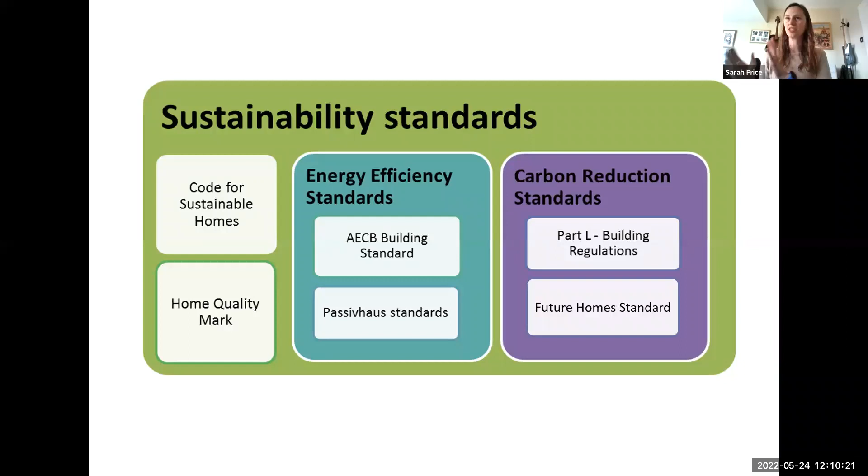The AECB was founded in 1989, and they actually launched the Passivhaus Trust in 2010, so they brought Passivhaus to the UK. Their purpose is to deploy environmentally responsible building practices. The AECB really looks at the cutting edge of what's going on in buildings, in retrofit, in new build, making sure that we are doing the very best when it comes to our buildings. They do an awful lot of training, and loads of things as a membership organisation, including lots of training under the Carbonlite brand.

But we also have these standards, the AECB Building Standard, and there's a Retrofit Standard as well. It's the building standard that we're interested in today. I'll talk a bit more about that in a second, but there's also some complementary mini standards around water, daylighting, and whole life carbon as well, which is the newest one.

The AECB standard is based on the Passivhaus standard. Originally we used to have different levels, silver and gold, and the gold was replaced by the Passivhaus standard, and then the silver became the AECB building standard that we know today. It's got slightly relaxed targets compared with Passivhaus, so the space heating demand isn't quite as onerous, but there's still quite a good airtightness target. Essentially, the rest of it follows all the rules of Passivhaus. You use the same modelling tool, PHPP, and you have to make sure that you meet all the Passivhaus requirements.

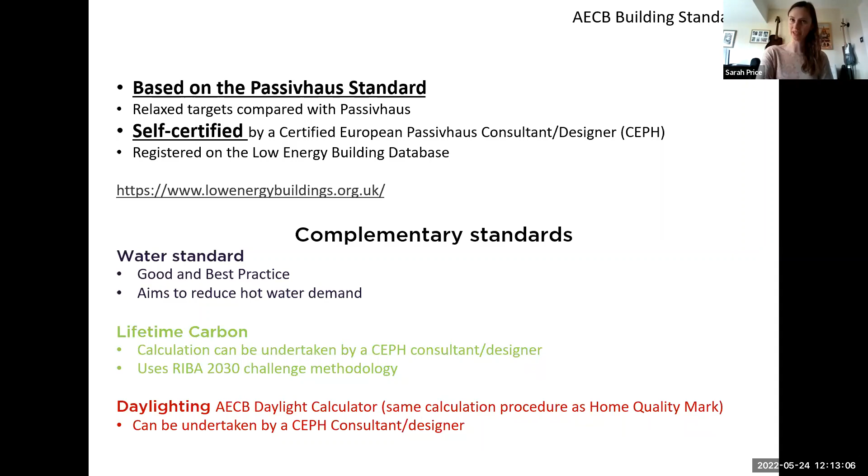AECB and Passivhaus principles are that we are aiming for low energy bills and comfortable living conditions. We've got possibly southern orientations, but we're making the most of that solar gain without having summertime overheating. We've got high levels of insulation, ideally a thermal bridge free design, or certainly continuous insulation. We've got continuous air tightness, absolutely, so really low levels of air tightness. And in Passivhaus, certainly we have high efficiency heat recovery, MVHR.

The AECB is actually slightly flexible. You can have MEV or MVHR, but today we are really focusing on the MVHR side of the AECB standard and the air tightness that goes with that - the 1.5 air changes that goes with that MVHR.

Obviously, it's not all just about space heating. We have to look at everything that goes in the building. So we're talking about regulated and unregulated. And then we've got a quality control process.

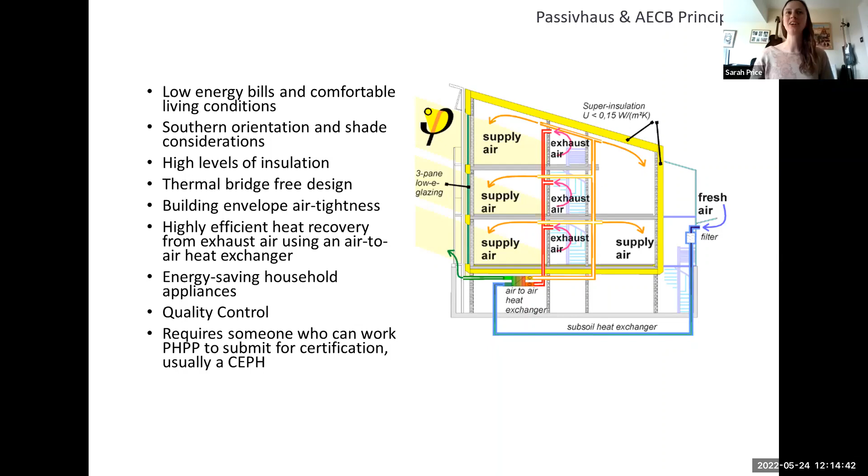In Passivhaus, it's slightly more rigorous. You have a third-party independent certifier who checks all of the information coming in. And in AECB, you have to bear all and put it all on the internet to get your project certified, uploading certain types of evidence required for the low energy building database.

So if there's one thing we know about Passivhaus, it's that there's no performance gap. We know that they perform. You may have seen this graph before, it's been used lots of times, but each one of the blue lines is a different building. We've got four different developments here in Germany.

We're interested in the average energy consumption. We've got little S curves on each of the sites because that's to do with occupant behaviour - some people like to keep their houses really warm, much warmer than others, and maybe open the windows, whereas others like to live in much cooler houses. So we'll always see this S curve, and what we're interested in is the average of that. What you can see is that it matches the actual energy consumption, matches the PHPP calculation.

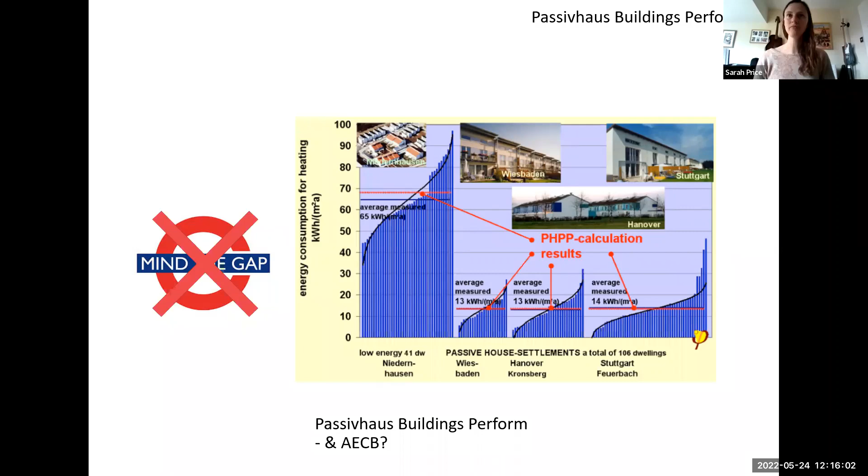That tells us the buildings are performing as we've designed. There is evidence that AECB buildings are following the same kind of profile. They've redone this research in the UK for Passivhaus buildings, and their findings are the same. For AECB buildings, it's not yet published, but there is evidence out there that they do also perform.

On the other side of things, we get a lot more out of Passivhaus and AECB because we get superior comfort. Sometimes Passivhaus is known as a comfort and energy standard, and that's simply because you go into a Passivhaus and you don't notice it - you don't notice hot head, cold feet or anything like that. It's just perfectly still, perfectly quiet, reduces noise pollution because of the air tightness.

You've got no temperature gradients, no drafts, really good indoor air quality so it doesn't feel stuffy. It's not too hot, it's not too cold, so we've got protection from overheating. It's beneficial for allergy sufferers on the health side because we're trying to filter out all of those pollutants from inside and outside of our homes and buildings. And we've got really low energy bills as well.

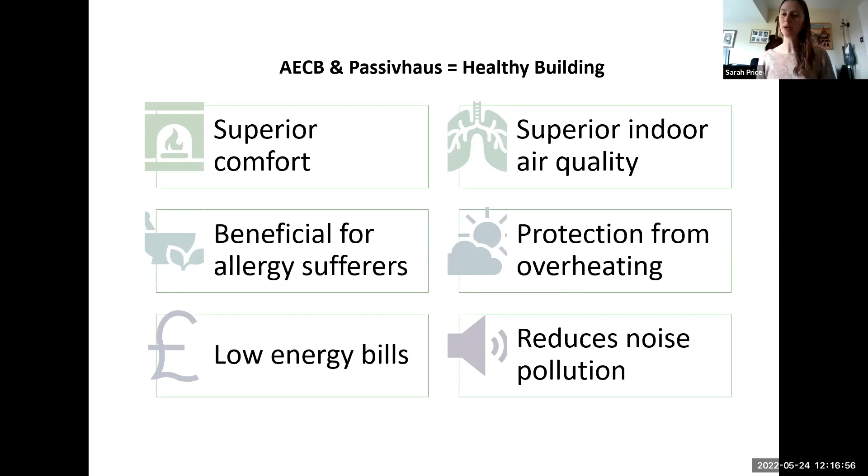So lots of other benefits from the AECB standard. That takes us on to the future home standard. Let's have a little look at building regulations and where we're going.

This is a diagram taken from the Passivhaus Trust Demystifying Air Tightness Guide written a few years ago. If you printed this out on an A4 piece of paper, it would give you the actual size of hole to achieve that air tightness for a metre squared of wall, roof, or whatever it is you're looking at. For every metre squared of external envelope, you would have something about that size - so it's relative air leakage.

Now for Passivhaus, obviously it's quite small, and EnerPHit, which is the Passivhaus Retrofit Standard, is a little bit bigger, and then the AECB MVHR standard is around 1.5 air changes. Building regulations' notional building is set at 5 metres cubed per metre squared per hour, and you can see quite a lot more holes in every metre squared.

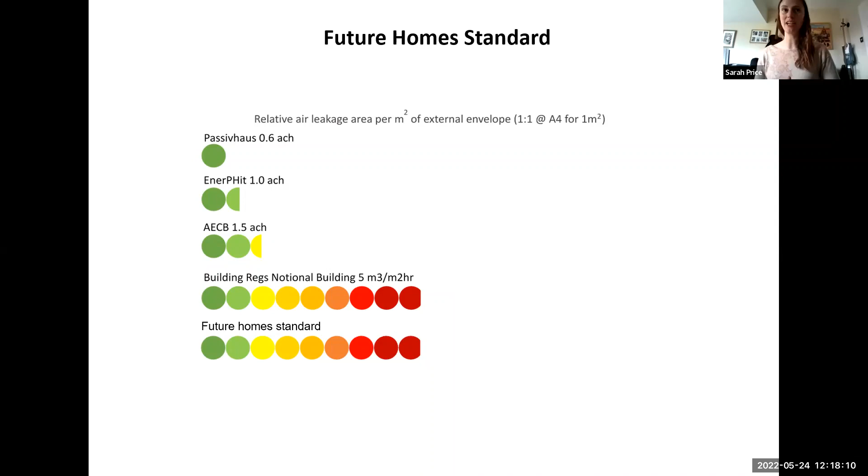Now, where are we going with the future home standard? Therein lies the problem - we're not going anywhere with it in terms of air tightness. The suggested future home standard indicates that there's going to be no improvement in air tightness.

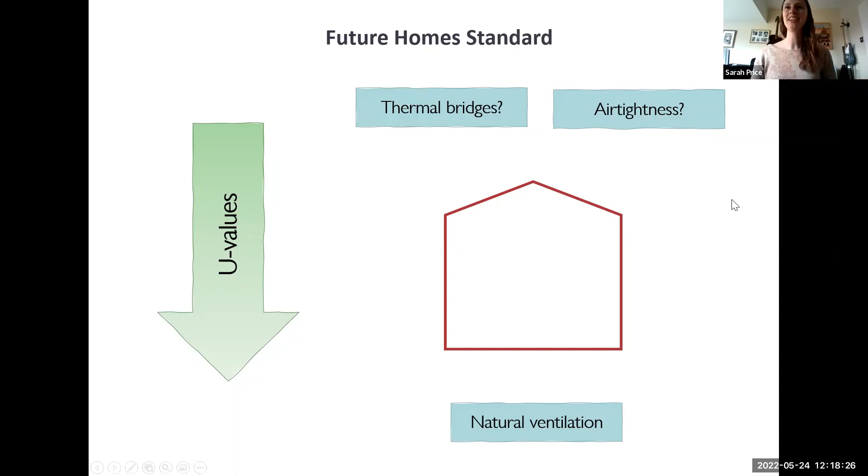So what we do see is a dramatic drop in U values - we are really increasing the amount of insulation we're going to put in our buildings. But is it really dealing with thermal bridges and air tightness? Unfortunately not. We're not seeing any improvements in air tightness or thermal bridging, and it still allows natural ventilation.

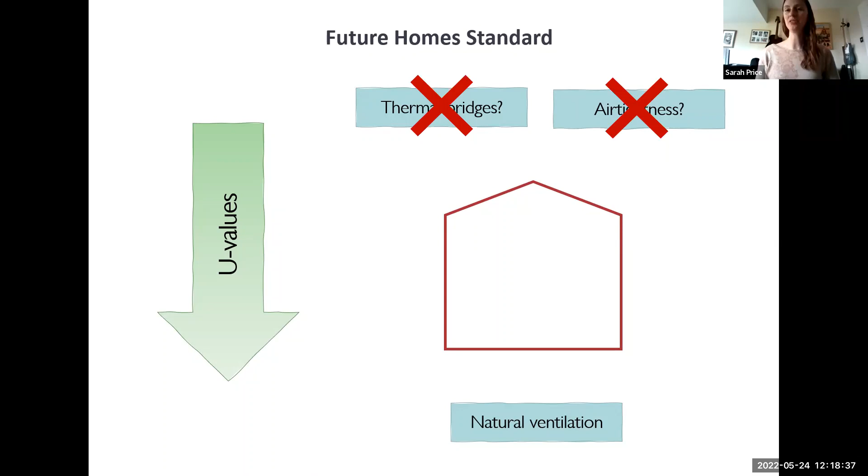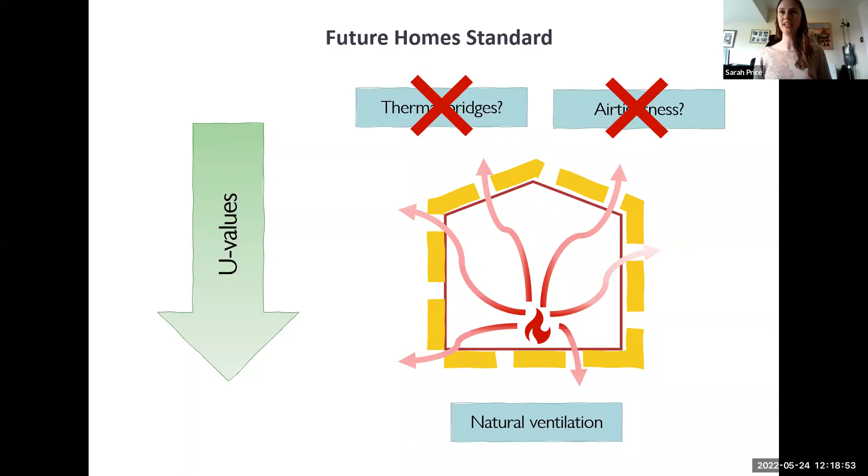So actually what we're doing is building really well insulated wind tunnels. Lots and lots of insulation, but it's not continuous. We haven't got good air tightness, we've got natural ventilation, so we're going to be letting a lot of that heat out in other ways.

This takes us nicely on to Wolfgang Feist, who was the father of Passivhaus in Germany. In the late 1980s, he gave this statement: I was working as a physicist. I read that the construction industry had experimented with adding insulation to new buildings and that energy consumption had failed to reduce. This offended me. It was counter to the basic laws of physics. I knew they must be doing something wrong, so I made it my mission to find out what and to establish what was needed to do it right.

Now, I feel this is where we are heading in the UK. Germany was there 30 years ago, developed Passivhaus, had a look at all the bits that matter when you get down to low energy buildings. And our future home standard is heading towards this scenario.

So some nice graphs for you just to try and illustrate this a bit more. I've taken the gains off, so just to not confuse us, but if we just look at the losses in this particular archetype, this is a semi-detached house, just as an example. The blue is the heat losses from walls, roof, floor, windows and doors, so all of the insulated elements. The red is the heat losses through thermal bridges, and the green is the heat losses through ventilation. This is ventilation and infiltration, so the leakiness of the building plus the heat losses lost through natural ventilation.

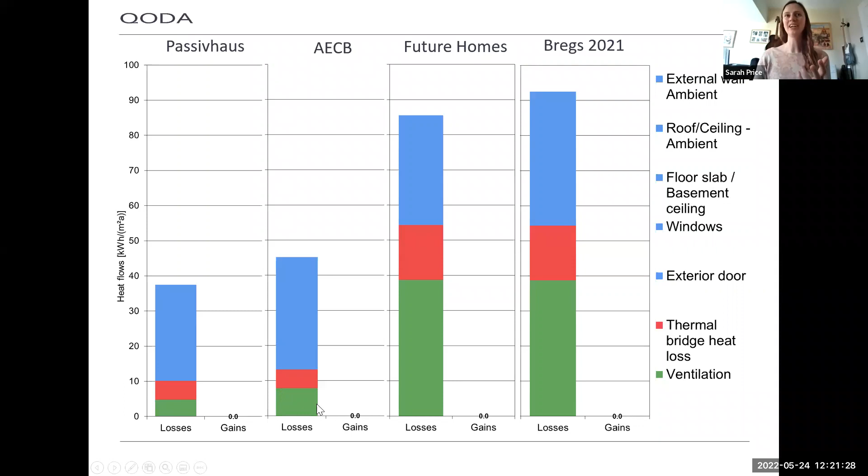AECB standard at 1.5 air changes really improves ventilation. We've got MVHR as well, so we're recovering heat. We've reduced the thermal bridging. U values are about the same, but you can see that we've almost cut in half the total energy use, the heat losses. Then Passivhaus, again, we're reducing that a little bit further still because it's better airtightness. So you can see that what is left is really concentrating on thermal bridges and ventilation.

So I'm going to hand over to Tim, who's going to tell me when he needs his slides changing. Yeah, great. Thank you, Sarah.

Good morning, everybody. So we've been modelling 6 residential archetypes for a district council in England, pretty representative of anywhere. We've developed a series of specifications based on different building standards, and we've tried to apply a level of parity between the Future Home Standard and the AECB Passivhaus standards. So the AECB and Passivhaus specifications are actually a reflection of the Future Homes notional building standards as far as we know them, and they're not tied specifically to the AECB or Passivhaus targets, such as space heating demand. It's really just trying to get that notional parity between the standards.

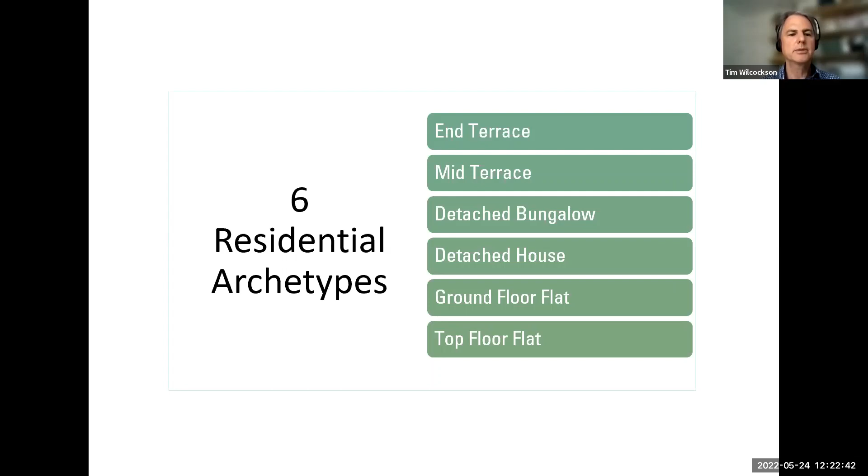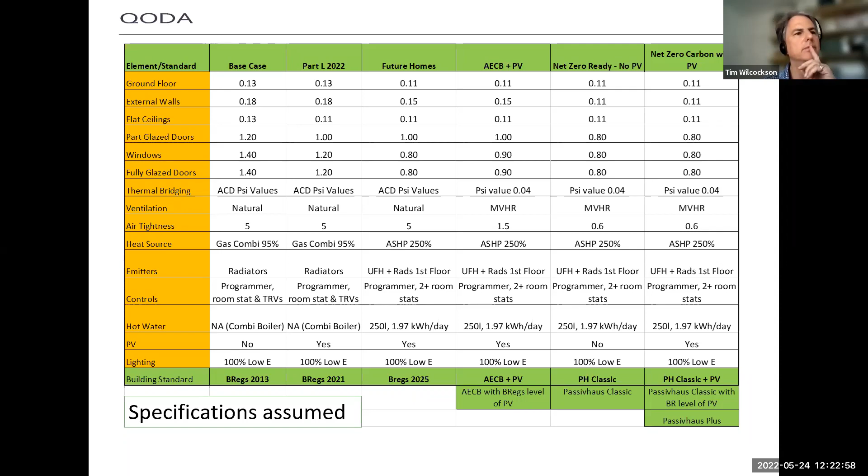So comparing these standards isn't ideal. These are the sort of specifications that are assumed. We've got the different standards, and you can see the differences in the specifications are, in fact, in terms of the fabric, pretty similar, whether it's Future Homes or AECB or Passivhaus. They are remarkably close on that level.

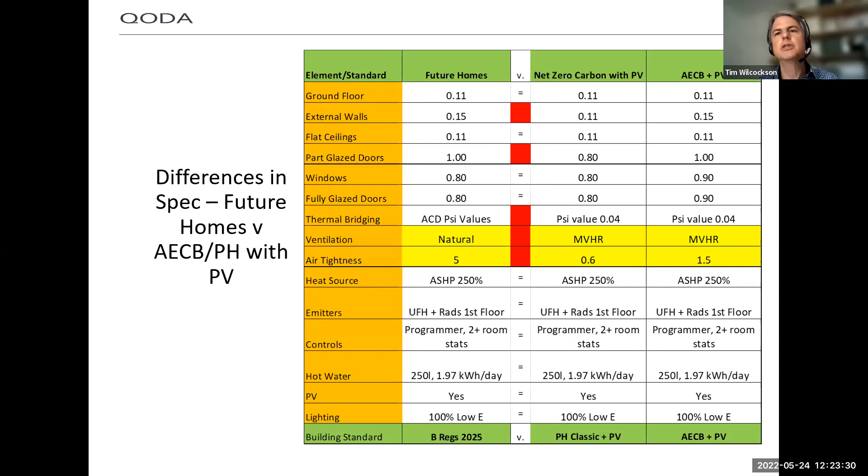However, I would like you to notice the levels of airtightness difference and the type of ventilation system, which we see as the key elements when building future homes.

So like all building regulations, Part L building regulations, Future Homes is rooted in the SAP methodology, and the new SAP 10.2, which will go live in June alongside the Part L 2021 regulations, will adopt increased cost per kilowatt hour. As we all know, it won't necessarily reflect exactly what we're actually paying. I've already seen for my home that we're going to be paying about 29-30 pence a kilowatt hour, maybe more. So energy costs are rising fast.

The fuel carbon emissions factors are coming down in SAP 10.2. So the Future Homes Standard has a stated aim of reducing carbon emissions by 75% and promotes electrification. I find it's a rather curious coincidence that the contribution from renewables nationally has been calculated and apparently shows a 73.8% reduction in carbon emissions from electricity since the last evaluation in 2012. By contrast, there's little change in the carbon emissions factor for gas, but the electricity reduction is significant.

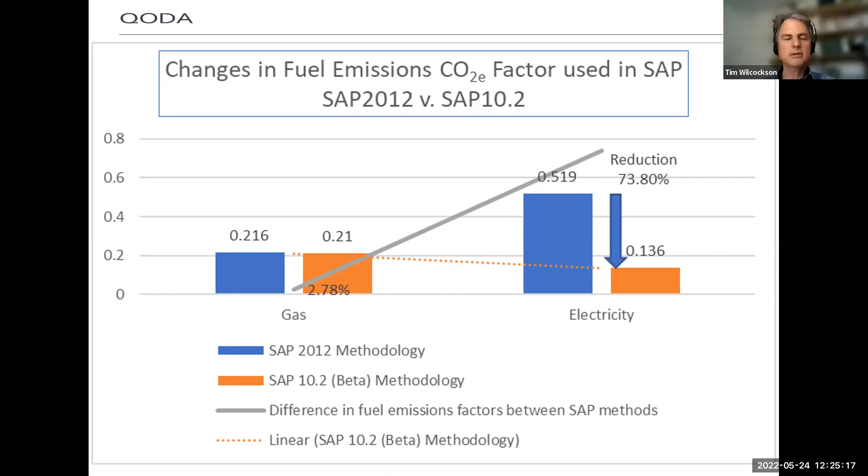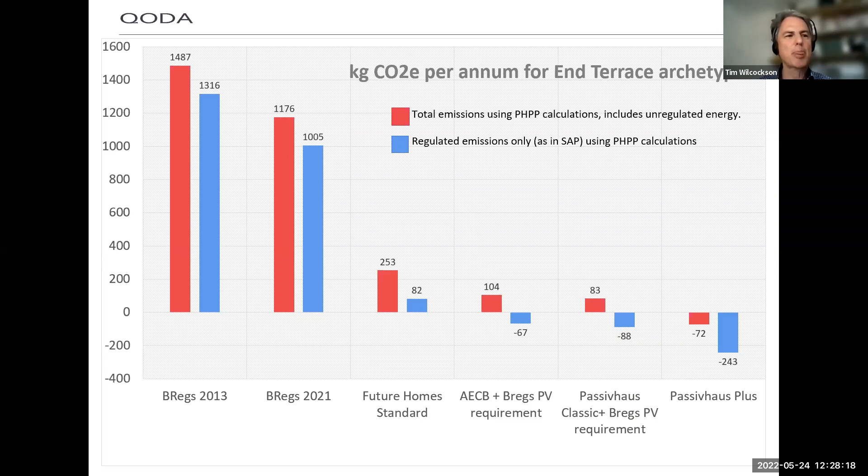So another way to look at this is to start with a fabric first approach, incorporating the MVHR ducting and air tightness that we need, and then add PV retrospectively, taking advantage of future improvements in PV efficiencies to enable minimal CO2 emissions. Something like the new panels that people are talking about, which are based on perovskite, for example, in Oxford.

This approach sounds remarkably like the Future Home Standard approach. It reduces long-term retrofit costs and occupant disruption, while at the same time locking in carbon savings for the lifetime of the building.

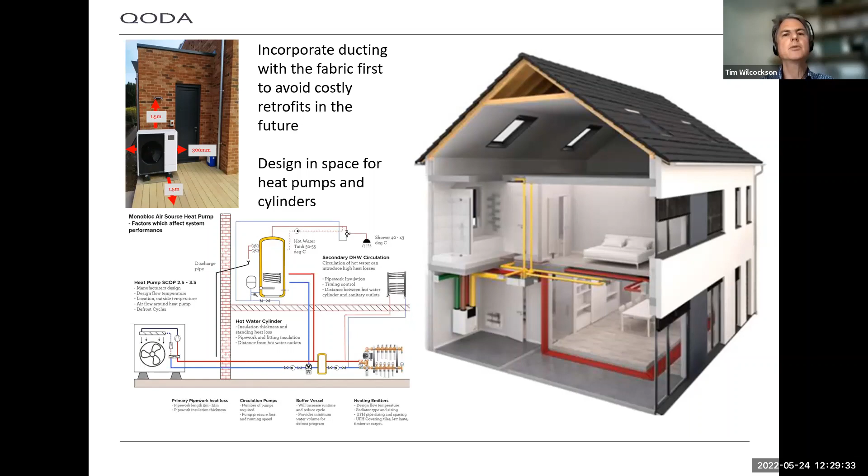Future-proofing by designing in space for heat pumps and hot water cylinders or cabling for energy storage would be sensible design precautions to ensure the fundamental fabric of a new building doesn't need to be disrupted. However, the Future Home Standard fails to provide the key element in the jigsaw, which is the air tightness of 1.5 or less with an MVHR system.

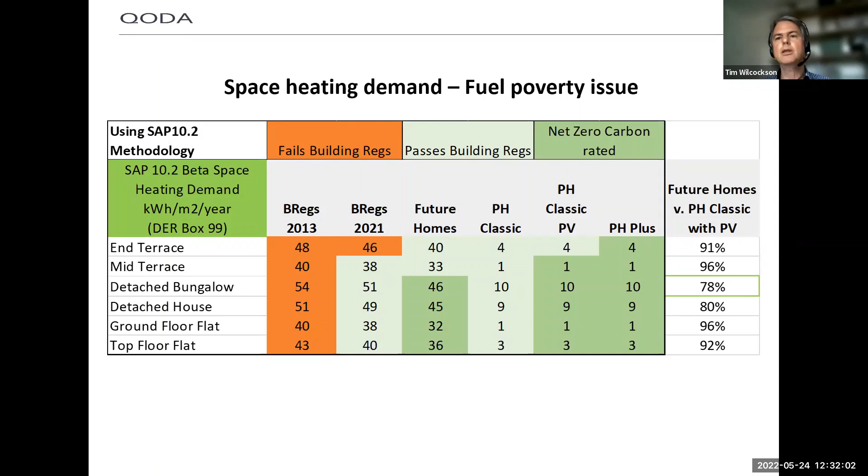The cost of constructing an AECB or Passivhaus standard home has been shown to be an uplift of about 6 to 8% compared to constructing a Future Home Standard home. But the annual long-term savings in energy bills that the AECB approach can bring will hugely benefit individuals and bring many other positive impacts locally and nationally in ways that more than repay these capital upfront costs.

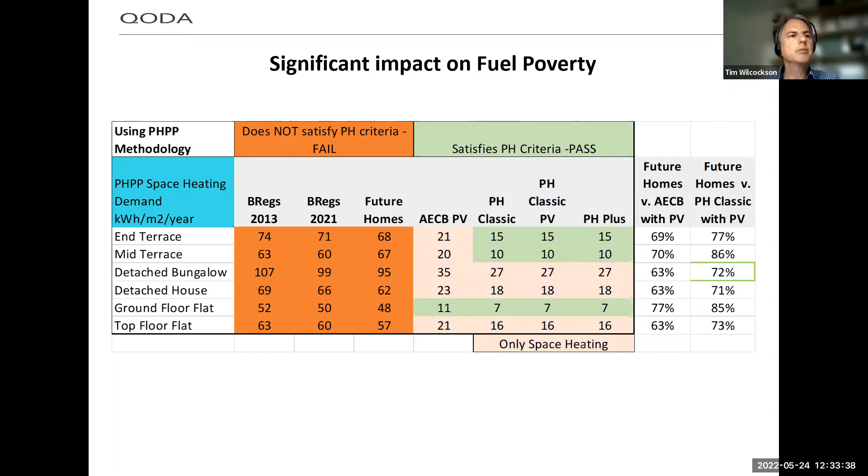And these are the International Energy Agency report back in 2014, illustrated some of the benefits of this low energy approach. It's really has a very big impact in many areas of our lives. Next slide, please.

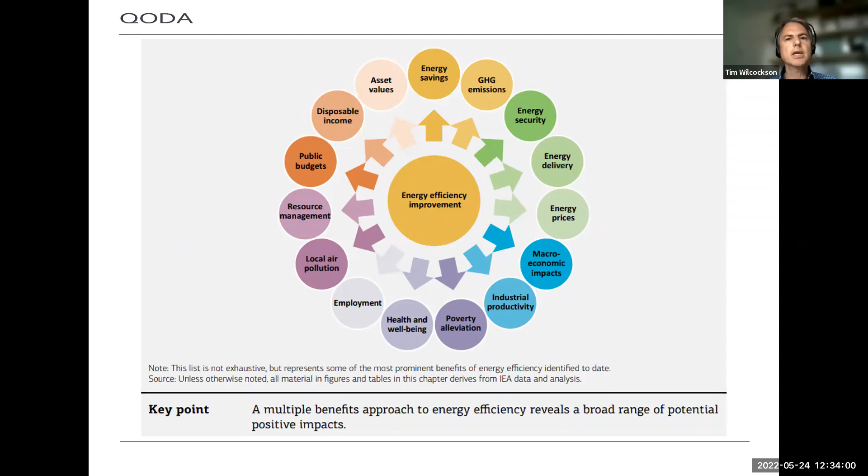So when we look at these two approaches, whether it's through the SAP building regs approach or through PHPP, we can see in both cases that there is a dramatic reduction in space heating.

What we see with the Future Home Standard is that we can provide a well-insulated wind tunnel, as Sarah has mentioned. But really what we're looking to is get some woolly jumpers with a Gore-Tex wind barrier included if we take the AECB and Passivhaus approach. It's really not complicated. We've just got to get the airtightness sorted out.

So SAP tends to focus on the carbon emissions, but as we move to decarbonisation, this focus will become less useful as a metric, and energy usage or energy demand will become the primary question. This is what LETI's arguing for, a more honest approach to our energy needs to inform our energy policies.

If we look at the yellow line, which is the detached bungalow, we can imagine that could be occupied by a person on a low income or with a disability or both. That's one injustice we could easily remedy by better airtightness, more robust fabric, and a good ventilation strategy.

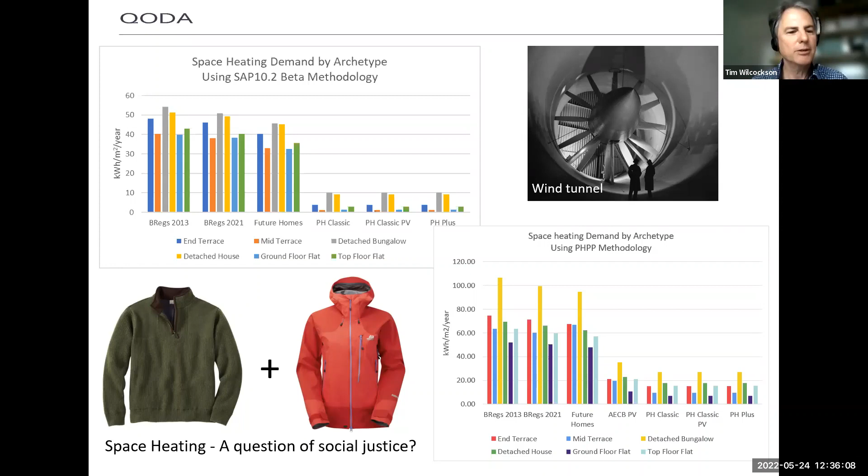Thank you, Tim. So I'm just going to try and summarise what we've been talking about. I've got a sort of technical stuff slide to start with, which I'll try and talk you through to make sense of some of what we've seen. We had some interesting questions earlier when we did this to our team internally, and so this is why I thought to put this slide in.

But one of the questions was, what is the main difference between PHPP and SAP as a modelling tool? And my response is, well, the main difference is that you have intermittent heating in SAP. I mean, there's other smaller differences as well, but they are fundamentally the same kind of tool. You know, they're both energy modelling tools with similar methodologies.

But more importantly, I think is how we measure what a good building is, and that is what Tim touched upon. You know, the fundamental problem with our building regulations is it's driven by CO2 emissions reduction, which gives us a technologically advanced building, you know, lots of solar PV, etc. Now, they have gone some of the way with improving U values, but it's not the same as a fabric first approach that we see in the AECB standard or the Passivhaus standard, which are driven by heat demand and energy.

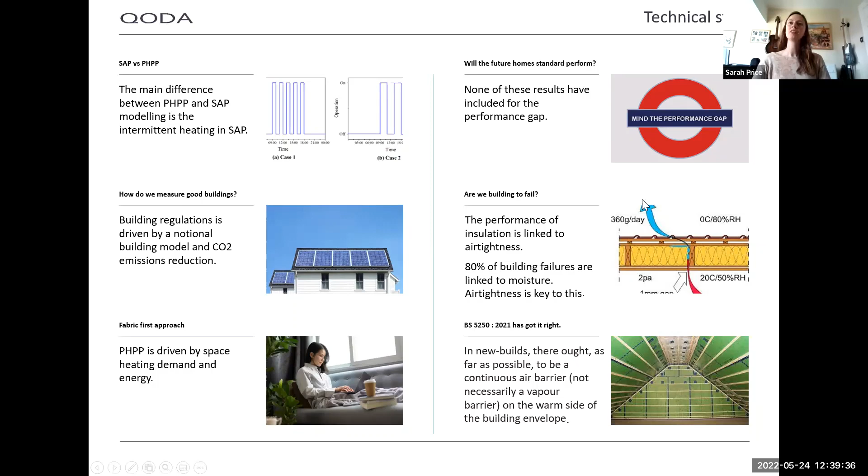So that's the technical stuff. Our conclusion from this is that Passive House is the new build standard we should be aiming for. There is no excuse to build any worse than Passive House. AECB Building Standard is a stepping stone to this - it takes you down the right path of airtightness, etc., but gives you that little bit of leeway if you've not done it before. It's being adopted by some councils, taking it forward in various parts of the UK.

The future home standard might be net zero ready, but it does not take into account fuel poverty, health and comfort.

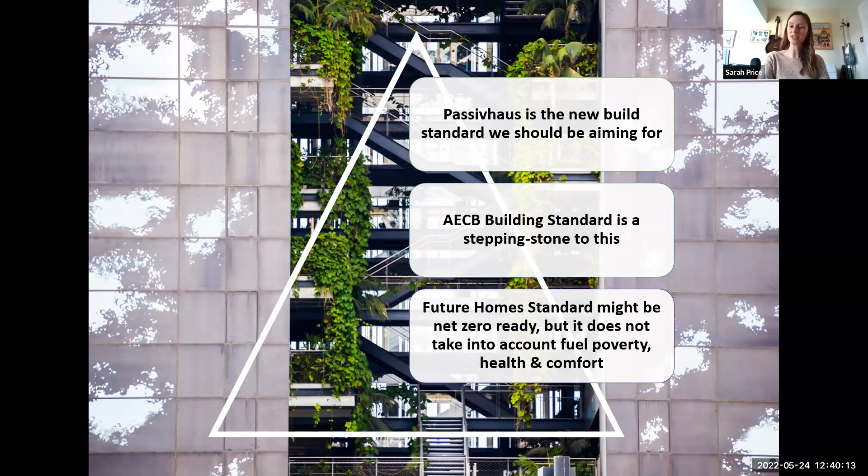And that, oh, one more slide. Yes, sorry, I've forgotten about this one. I always forget about this one.

We did some interviews with contractors, developers and housing associations. This was on behalf of another council, because they asked the question: what is equivalent to Passivhaus? The results were 83% said there is no equivalent, and the reason it was only 83% is because the other 17% didn't have enough technical knowledge to answer that question. So I think that says a lot really about Passivhaus, in the fact that there isn't really anything else as good as Passivhaus in terms of performance and fabric first standard.

Thank you very much. That's it from us.

Thanks, both of you. I think you can be reassured, Andy - there's still a role, there's still a role. The AECB standard was originally conceived as a stepping stone, so it's interesting to see that you still feel it has that role. Although the quicker people take that step, the better - the sooner we can retire the AECB standard, the better, I think. Well, I think it's particularly relevant to retrofit, actually, the AECB.

Yes, especially. Yes. There is a question about retrofit, so we might briefly touch on it. So I'm aware of the time - we've got 20, we normally finish at 1. Sometimes the audience and presenters are enthusiastic enough to just let it go a little bit longer, but we generally try to aim for 1. So we've got 20 minutes, which is actually quite a good time. We've got about 8 to 10 questions, which I will go through.